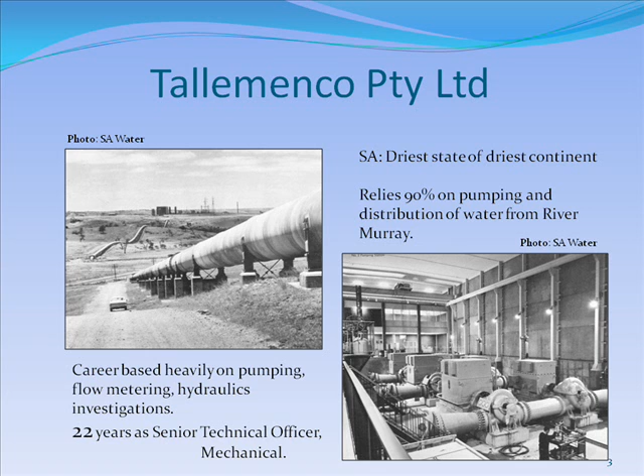South Australia is the driest state of the driest continent on Earth, and Adelaide requires 90% of its water pumped from the River Murray in a dry year. In fact, much of the settled area of South Australia is dependent upon River Murray water, with a labyrinth of pumping and pipeline systems. It was in this environment that Rob's career became heavily based on pump testing, flow metering, and hydraulics investigations.

Rob transferred straight from his trade training to assist the pumping engineer to performance monitor all major pumping plant throughout South Australia. He regularly tested around 200 pumps and conducted over 1,000 tests on pumps from 22 kilowatts to 5,000 kilowatts. Each pump test was accompanied with an economic analysis, which in turn drove pump maintenance programs. Through these tests, he learnt much about the characteristics of all types of pumps and flow meters generally, and especially about pump testing limitations.

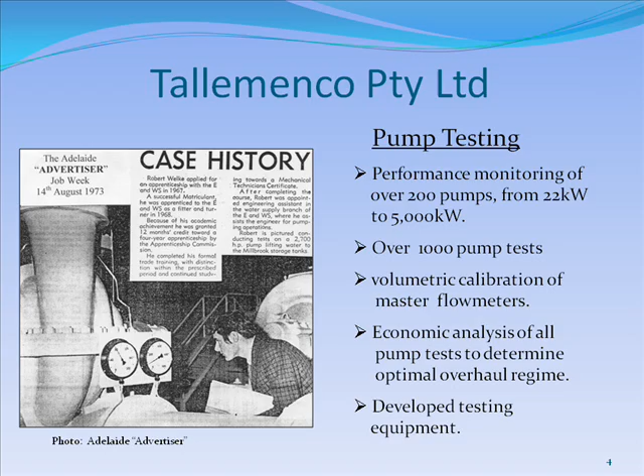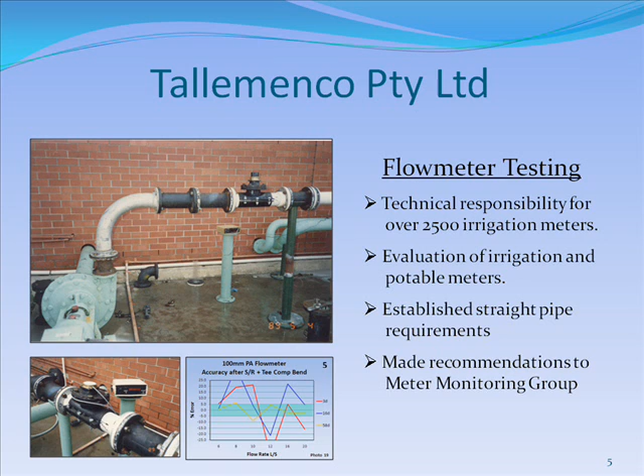For a number of years, Rob was a member of the Flow Meter Monitoring Group and assisted in technical and maintenance responsibility for over 2,500 irrigation flow meters, as well as thousands of potable water meters. He conducted extensive accuracy testing of many types of meters to determine the most suitable installation criteria for all SA Water flow meters.

Because of the large lengths of water trunk mains in South Australia and their influence on pumping costs, Rob conducted periodic pipeline friction tests on the pipelines from 80mm up to 1.8 metres. The results from these tests were used to determine pipeline maintenance programs, such as additional chlorination to improve pipeline performance. These tests served to familiarise him with realistic friction C values for all pipe sizes and types, which assists him in his present-day design services.

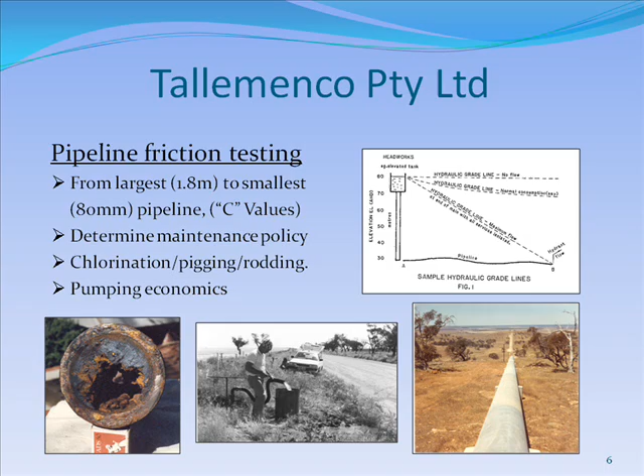During one particular hydraulics investigation, Rob devised the pump data chart. This chart can be used to quickly determine cents per kilolitre pumping costs, given operating head, pump efficiency, and electricity cost in cents per kilowatt hour. In recent years, he has greatly enhanced this chart to include other features, and it can be downloaded free from Tallemenco's website.

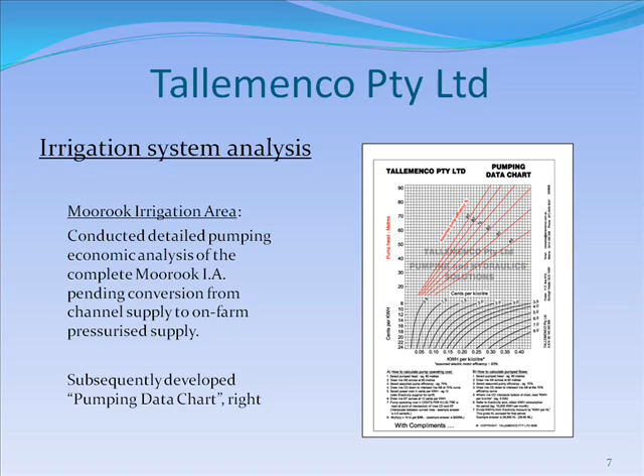Rob's professional training commenced in 1966 when he undertook 2 years of study in the Bachelor of Technology Mechanical Engineering degree at the South Australian Institute of Technology. He studied key subjects such as hydraulics, metallurgy, engineering materials, and strength of materials. In 1983, Rob qualified for the Associate Diploma in Mechanical Engineering, majoring in corrosion prevention. These qualifications and experiences enable him to embrace many engineering issues in pumping station design today.

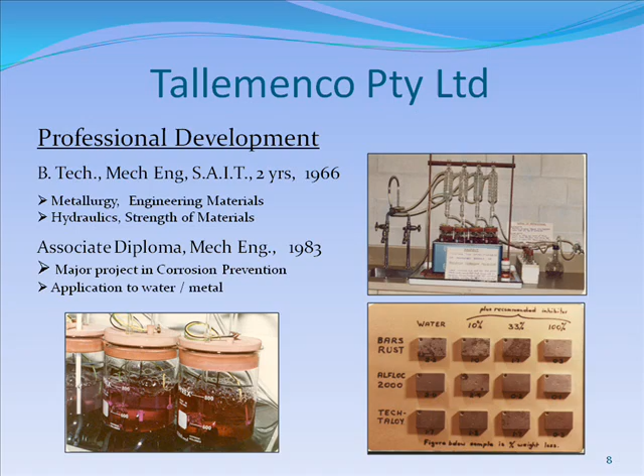In 1994, Rob commenced with Hydrotech Australia in Adelaide, where he was responsible for the design, assembly, and in some cases, installation and site commissioning of nearly 100 packaged pumping stations for the golf, turf, horticulture, and agriculture industries. During 6 years with Hydrotech, he learnt that his pump testing, trade training, corrosion prevention and metallurgy knowledge were keys to successful pump system design.

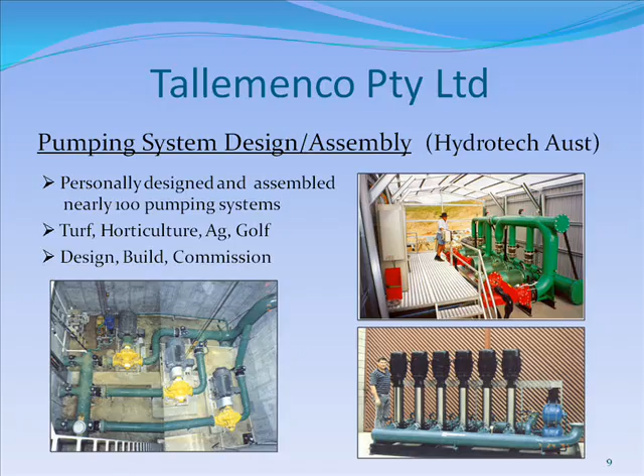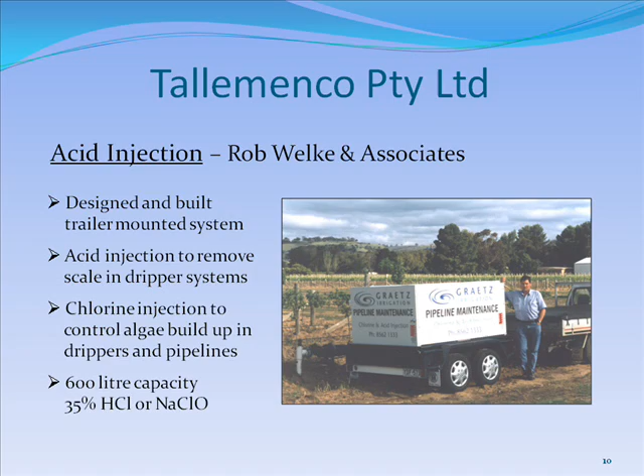In 2000, Rob designed and built an acid injection trailer for the horticulture industry to treat dripper systems blocked from the effects of iron hydroxide in groundwater supplies. It's computer controlled and holds 600 litres of either 35% hydrochloric acid or sodium hypochlorite. This unit is still in use today. This project introduced him to the complexities of water chemistry and its site treatment options.

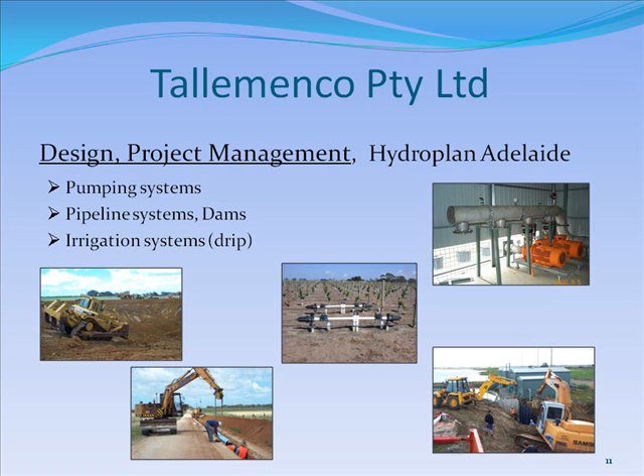Later in 2000, Rob joined Hydroplan in Adelaide as a project consultant. During the next 3 years, he designed pumping stations, pipelines, drip irrigation systems, turkey's nest dams, as well as project managing these. He also undertook irrigation audits.

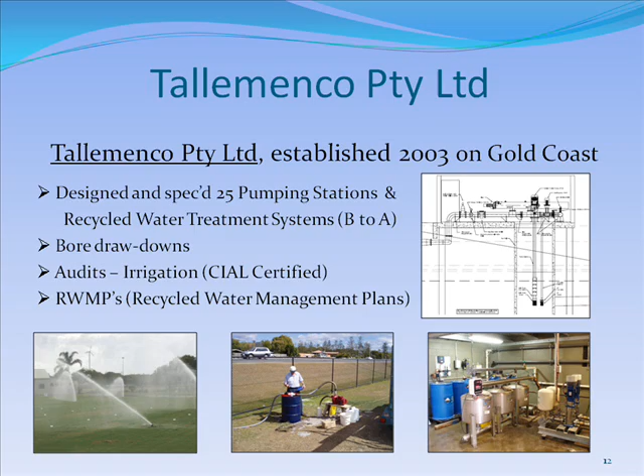In 2003, Rob moved to southeast Queensland and established Tallemenco as a consultant to the irrigation and water supply industry. His services include irrigation pumping station design, water treatment plant design, and pump testing and pipeline friction testing. He wrote numerous recycled water management plans for water treatment plants and golf courses. And Rob became a certified landscape irrigation auditor and conducts irrigation audits and bore drawdown tests.

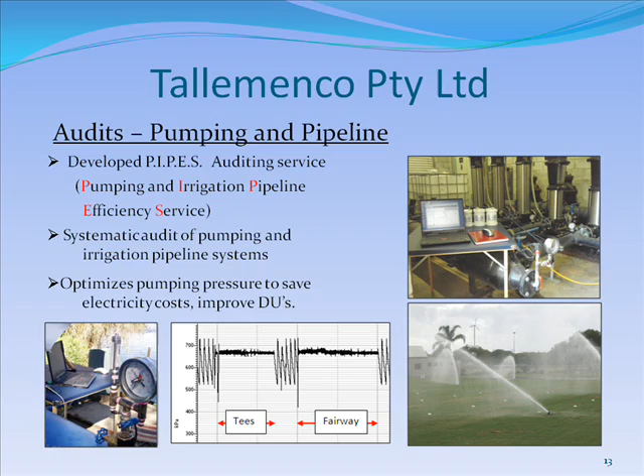In 2005, Rob developed his PIPES auditing system. PIPES stands for Pumping and Irrigation Pipeline Efficiency Service. This auditing method uses multiple data loggers to collect and interrogate recorded data to optimize irrigation pressure and save on pumping costs. PIPES is Tallemenco's flagship service, and Rob's extensive background in pumping and hydraulics provides clients with the best problem-solving service that the irrigation industry has to offer.

Given Rob's wealth of knowledge and experience in the pumping and hydraulics fields, Tallemenco provides irrigation clients with state-of-the-art irrigation audits and all aspects of pumping and pipeline design and testing.